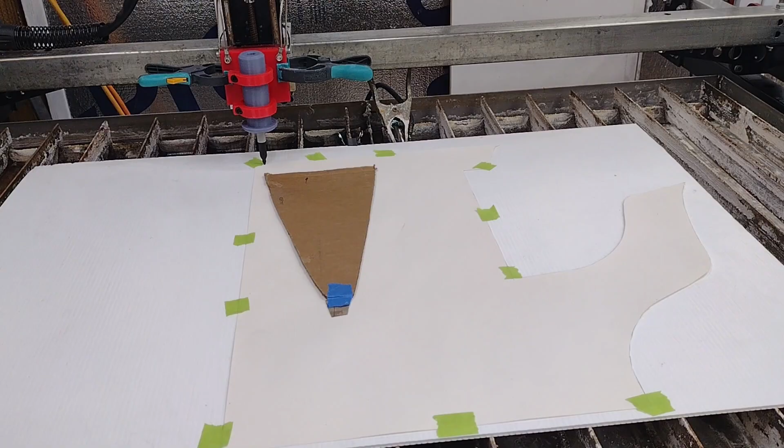I'm trying two tests at once. So normally when we test something out, we're supposed to limit our variables, but I've doubled my variables. I'm gonna try out my new pen holder on my plasma cutter. As you can see, I've got everything set up and I'm gonna try this out.

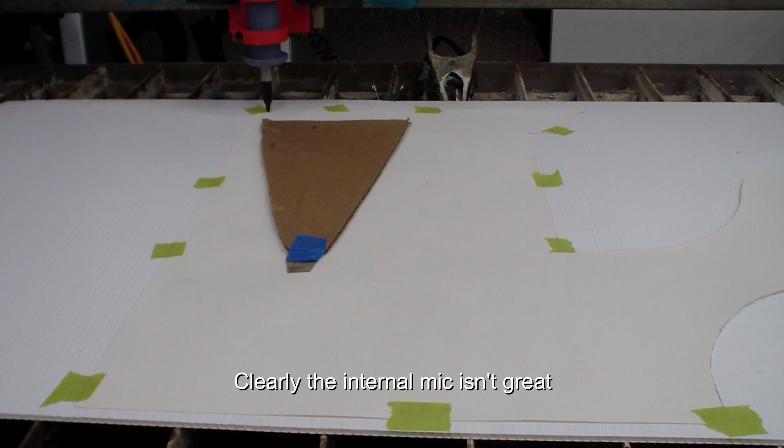I'm also trying out this video camera here that I got as a present years ago. I've tried it before and it wasn't great quality, so I'm trying to tweak it and see if I can get some good quality out of it. So I may revert back to my video camera just to capture this footage here.

So I've got everything set up on Crossfire. Again, I'm going to try this out. This is the first time, so this is a dry run, or a first time run, I guess you could say. It also might be a little slow. This is 20 inches per minute. But I didn't want to go too fast.

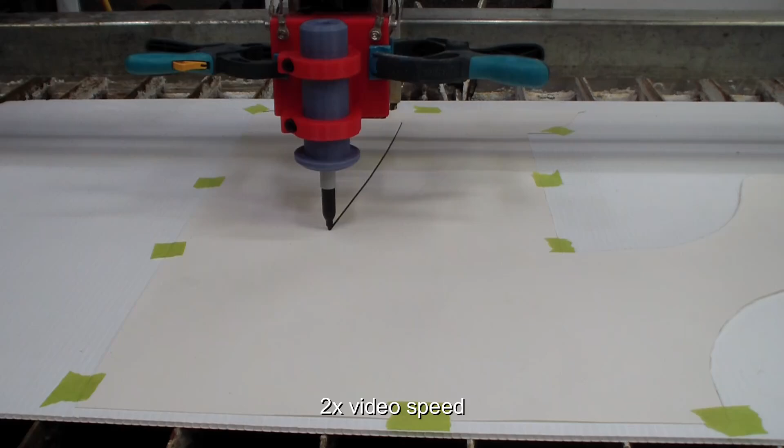I tried to make this loose so it would drop down on its own. In other words, the gravity of the pen. But in general, you can see it's doing fine. I'll probably rerun it again just so I get that top side.

All I'm doing is I'm going to cut this out and then put it in place to make sure that the aluminum for the heat shields on the wing roots, which these are the aft 2/3 of the wing root heat shields, gives the same coverage as my templates. Match them up to my templates and then also do a final dry run on the wing roots.

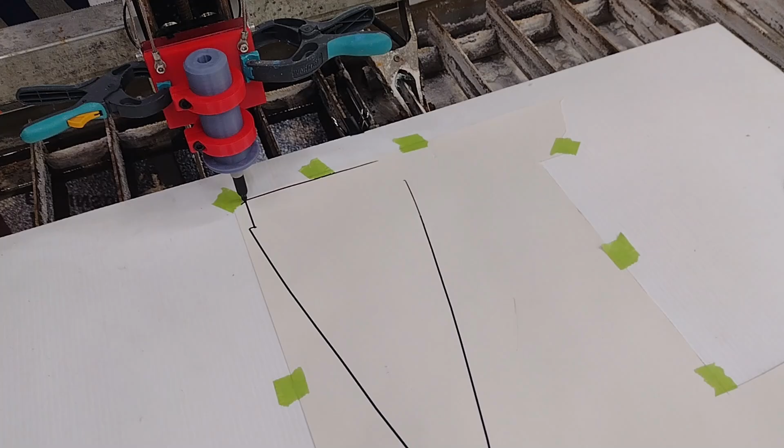Okay, I'm going to do one more dry run to get that one corner with the pen right here. Okay, so this is the right side. Probably should remove that. So this is at 30 inches per minute, just a hair faster. I'll probably start doing this at about 40 to 60. I'll keep upping it more and more.

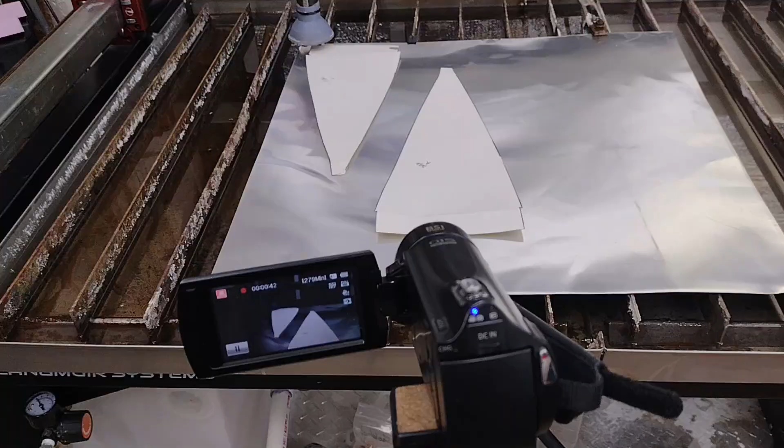Alright, so the test is good. I'm very happy with this. I'll cut these out. I decided to resume my testing of this camera right here by going ahead and cutting these guys out of this 20 thou 6061-0 aluminum. I have to tell you, this aluminum is so thin, it's like peeling peel ply off of aluminum foil. It's got a lot of creases in there. And I actually put a board on there to help.

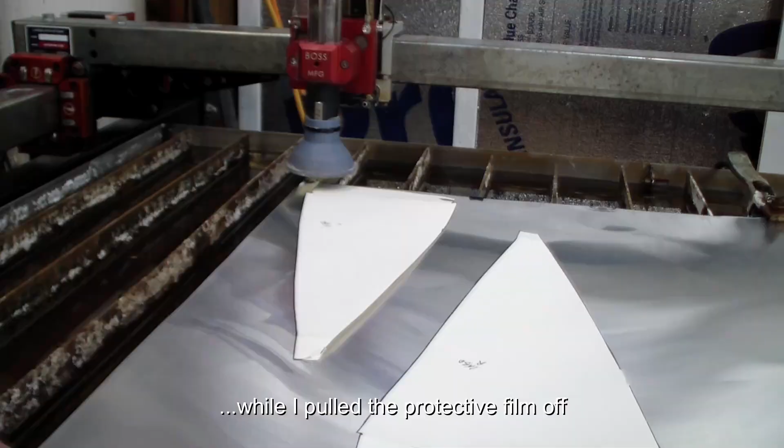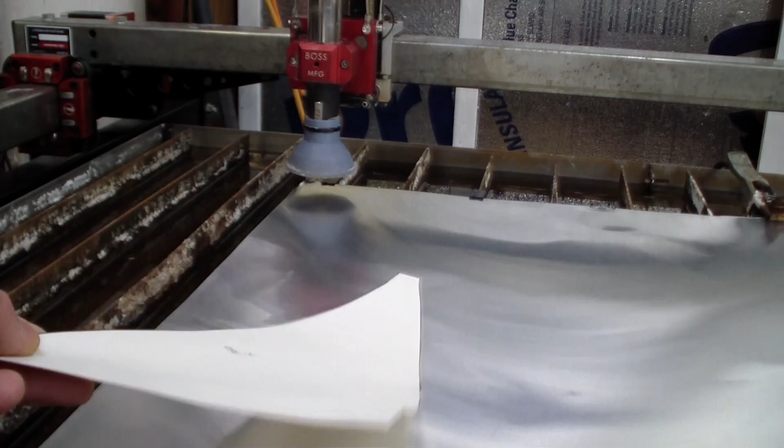This stuff is thin. So I'm going to go ahead and cut the left side first. That's exactly as I put it into CAD. The right side, I took a little bit off around the border, around 18 thousandths all the way around, just to get rid of the thickness of the line. It was just a hair proud. So that should be fine. And then of course, if I need to, I can hit the edges with the file. Alright, let's fire this thing off.

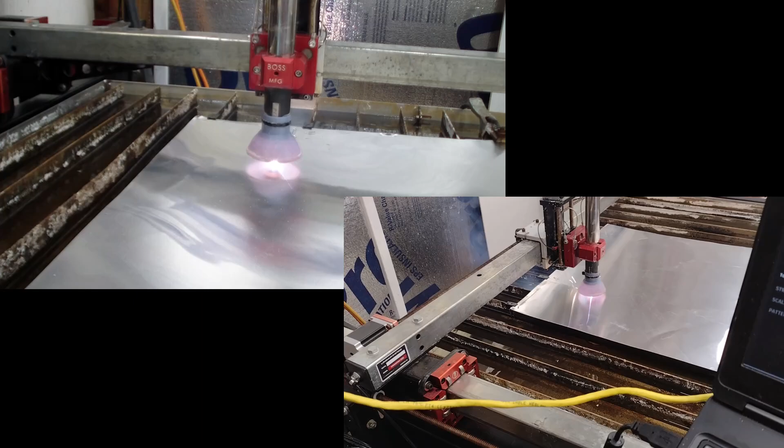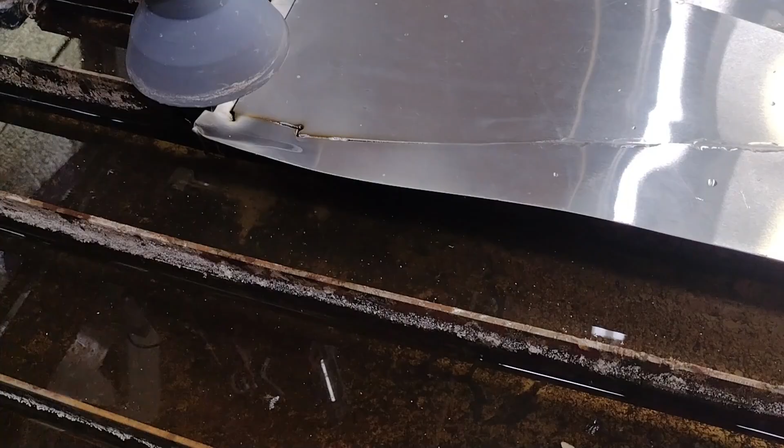I didn't get a cut all the way through just because this stuff is so thin. It's hard to cut. I'm just going to go ahead and do it again. It's not tearing it up as far as the heat signature around the edge. So we'll do it one more time. Here we go.

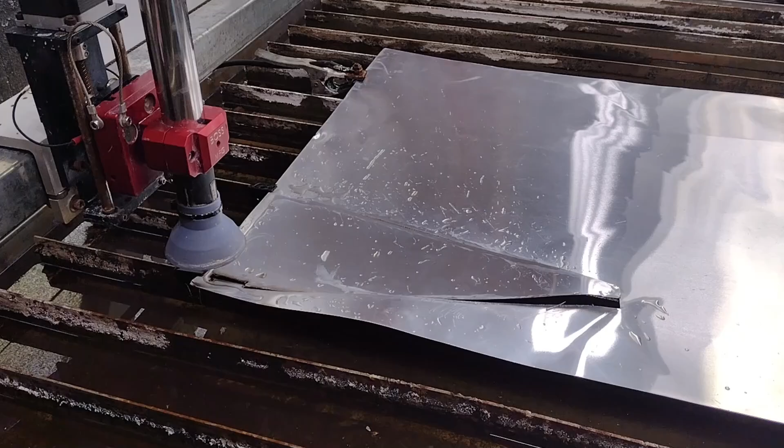Okay, so that was the left side. Got a little bit of curling, I guess, probably from the heat, just the spring back, but I think it's a pretty good cut. Anything that is not cut through, I'll just go ahead and hit it with a Dremel. So I wasn't sure if it cut all the way through, but it did the second time around, so that worked. So there's the heat shield for the left side. And again, this is just the aft 2/3.

I'm not going to be using this thinner 6061 aluminum for the forward third. It's going to be either the titanium 20 thousandths, which will be stronger than this stuff, of course, or it'll be the 32 thousandths 6061, or possibly I might try stainless, and I think it's either 16 thou or maybe 20 thou. So I'll play with that, but it needs to be a little bit stronger than this.

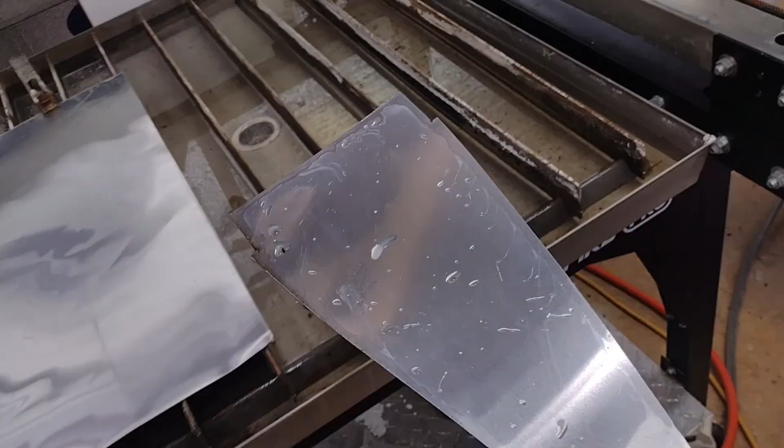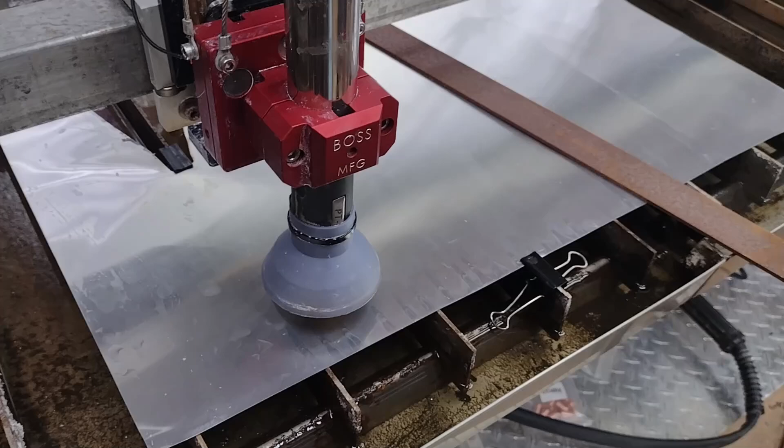Okay, so I've got this set up for the right side. At least I hopefully do, because I don't have a lot of nice 20 thousandths aluminum left. I don't know if you can see, there's a number of little divots and bends just from the handling over the years, and taking that tape off of both sides.

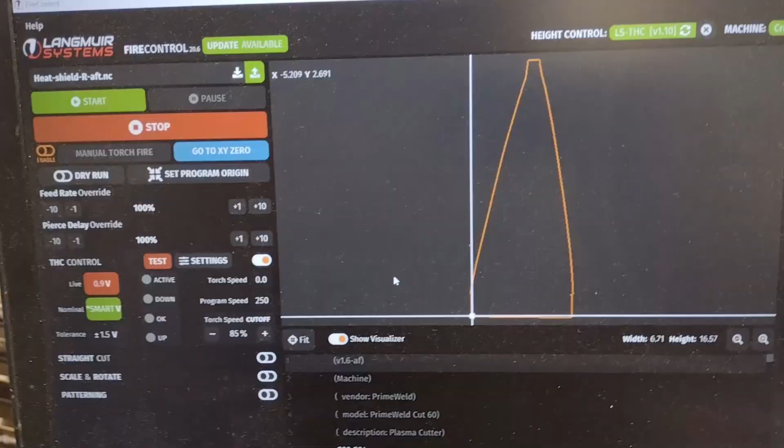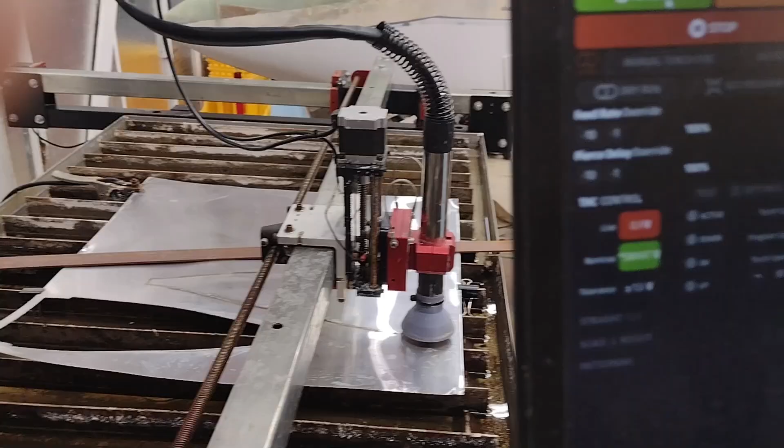Okay, I got an error again because it's so thin. We're going to try this again. Okay, I post-processed this again. I changed a couple small parameters, partly based off of the warning that I got. So we'll try this again, see if it cuts any better. Nope. Okay, I thought this might be a little bit camera shy, so I tweaked a couple more parameters and then tried it again.

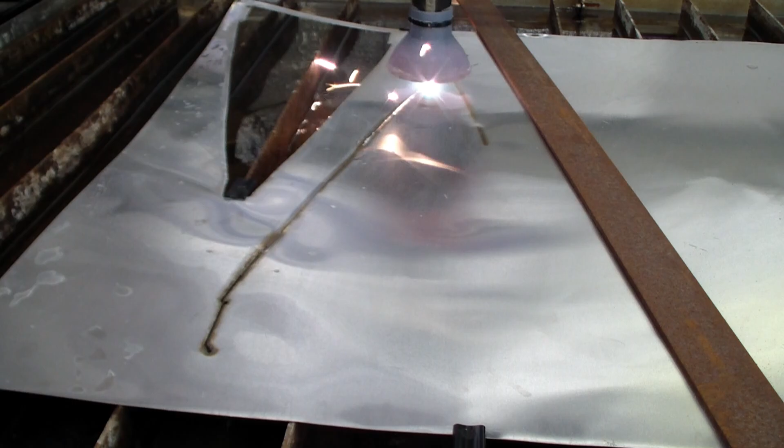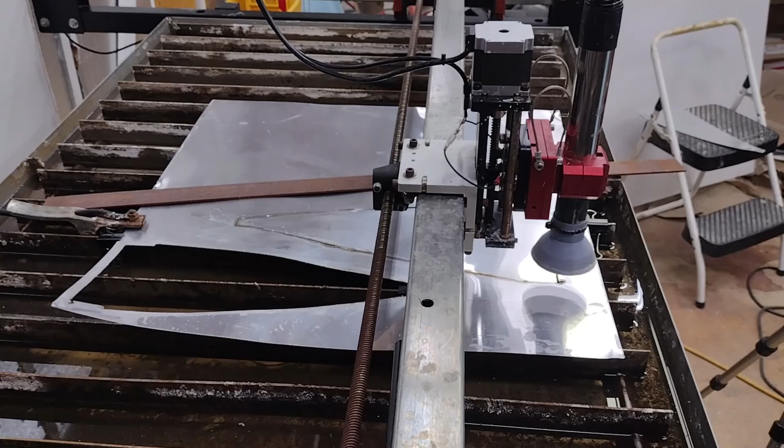It made it all the way around. I think one more cut and it'll cut it out. So it'll cut it out as far as cutting out the shenanigans and actually cutting out this piece. All right, we're going to try it one more time. All right, I think we got it. Finally, success.

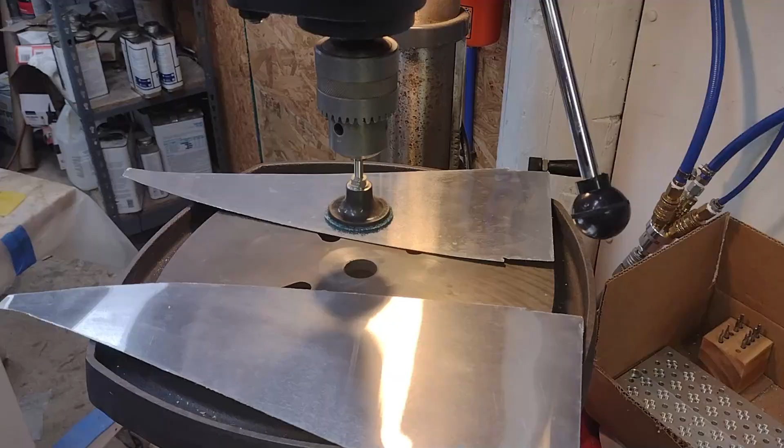And then see what we got. Yep. Okay. So here's the right side. And I think I was able to get it through where all the dents and stuff were. So I think we've got two actually good pieces. So I wasn't sure if I was going to engine turn these heat shields or not.

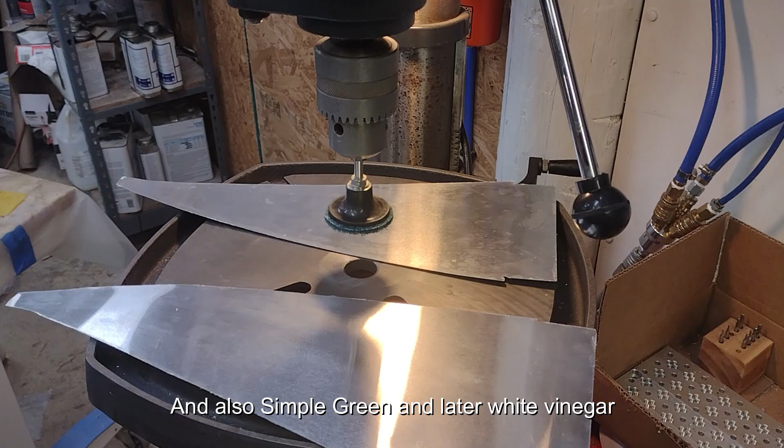And then one issue that kind of cropped up that I wasn't expecting, I wiped these off quickly when I plasma cut them last night. And then this morning, as I was cleaning them up, I hit them first with acetone and it cleaned them up in general okay. And then, especially on the left side, there's just marks on there that I guess if I hit it with aluminum polish, they would clean up and that would be fine. I don't have any aluminum polish. I was leaning towards engine turning them anyway.

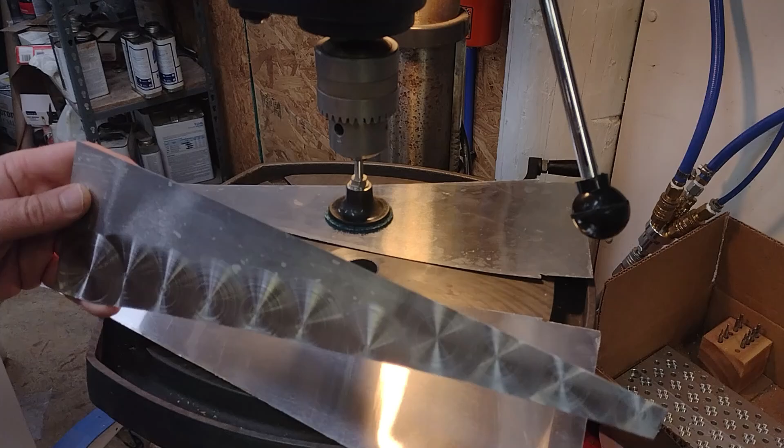One of the issues is that, again, this material at 20 thousandths is so thin that I didn't want the pressure of the disc coming down to deform this, or because these can get a little bit hot. And so I just grabbed a scrap and I didn't even clean it. So this is right off from one of the sides of when I plasma cut these heat shields out. And again, I didn't clean this, and then I just hit it really quickly when I mounted this. I'm sure if I cleaned it up a little bit more, it would look even better.

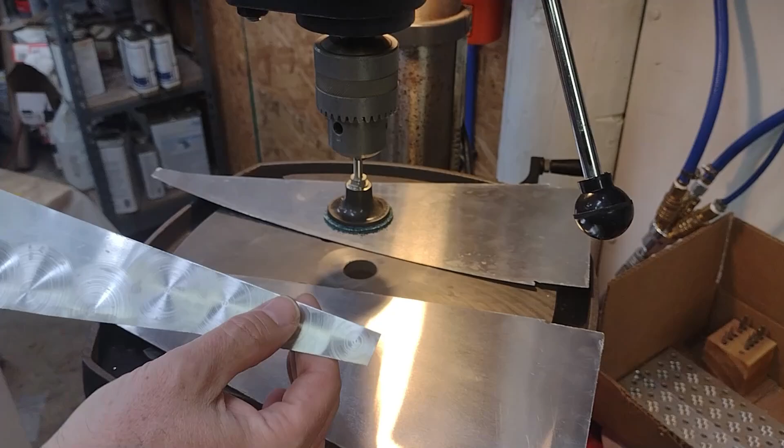It didn't in any way, shape, or form, especially on the narrower end down here. I was a little concerned with the pressure coming down, that it might bend it up or something. It did fine all the way down, just like on the 32 thousandths. So I'm going to go ahead and engine turn these heat shields, and I'm not going to engine turn the other ones. And when I mount these here in a little bit, I'll show you the difference. These are on the very edge of the wing root.

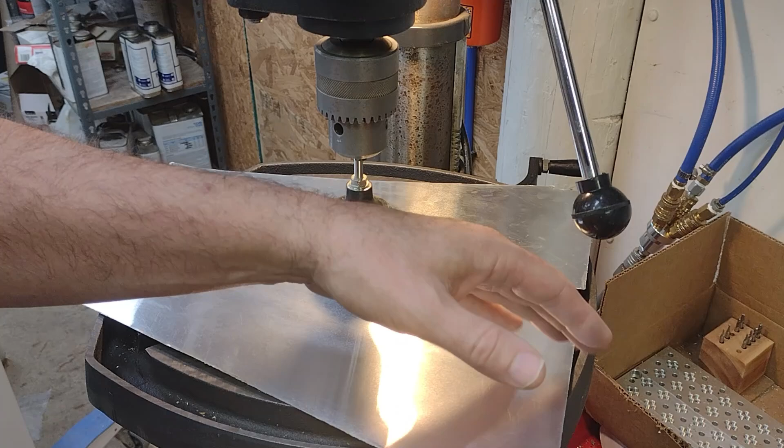The other ones in front of these are inset about 1.5 inches, and that's what these little round grooves are for, because I'm going to bend this after I engine turn it. I'll bend these tabs, which are 1.5 inches, in 90 degrees, and then they'll marry up with a dog leg for the front, which is inset 1.5 inches, because that's going to go forward and hit right at the very front corner of the wing on the vertical corner.

And there's a gap there between the wing and the center section spar that needs to be covered or filled in to keep the hot gas pressure from the engine compartment from running down the center section spar and escaping out along the center section spar. Not only do you not want that heat going out along that bare glass that's not covered up along the center section spar, but you're also losing cooling air, and then you're allowing hot air to go down, and you just don't want it. So a few different reasons for covering that up. Thus this bend right here.

Also, this side's still dirty, but it took me maybe 5 minutes a piece, just hitting the edge with a Dremel tool to get the dross off, minimal dross. The cuts on these are really good. There's hardly any heat affected zone visible, and so I'm really happy with the numbers so far that I've got off the matrix that I built for all the feeds and speeds, if you will, for the plasma cutter and the plasma cutting table.

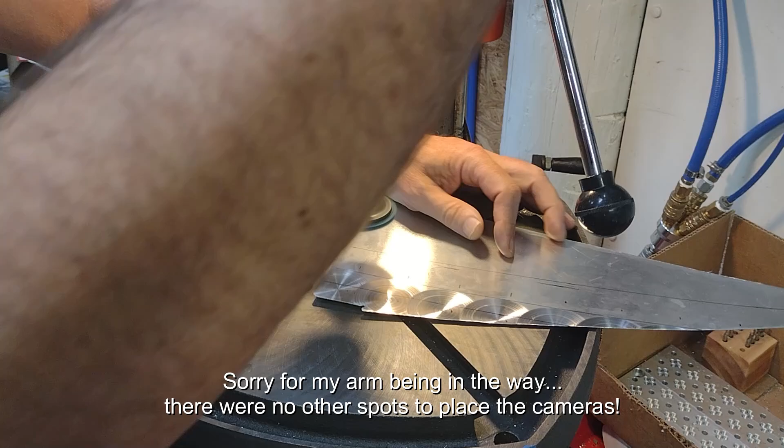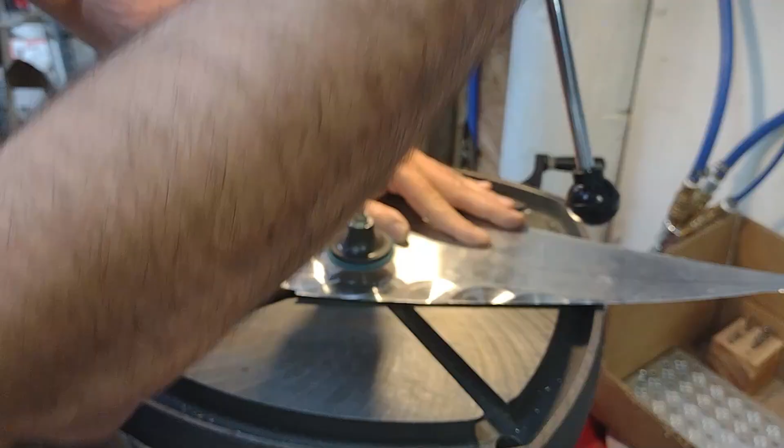All right, I'm gonna get to this. To get this started, and to not belabor this video, I went ahead and started this first row. This is on the left. Now the left heat shield covers about 2/3 of the wing root from the very aft end forward, and then the right covers about 3/4, but just as a little side note. But here's the beginning, and then I'm going to go ahead and do the next row. Looking good. I'm going to mark up and do the next row.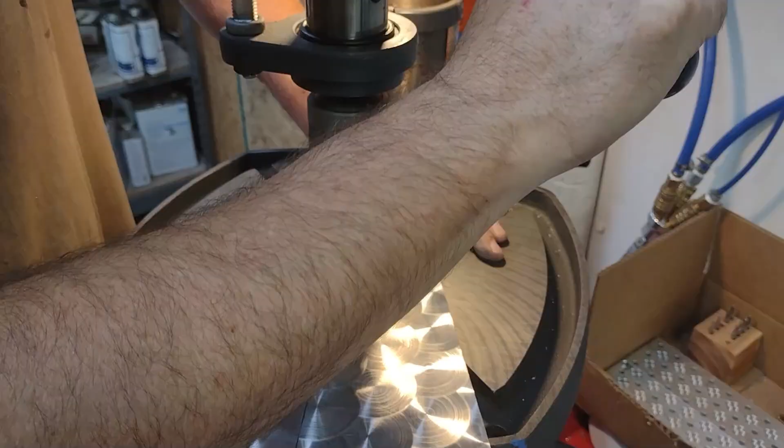Like I said in my last video, if you look closely at any individual circle, you can definitely see lines and all that, but just the total effect that you see, that prismatic effect, it just really spiffies it up. So again, this is the left side. I'll clean this up, and then I'm going to bend this, and obviously I'm going to do the same thing on the right side. This is definitely looking good, and I'm pressing forward.

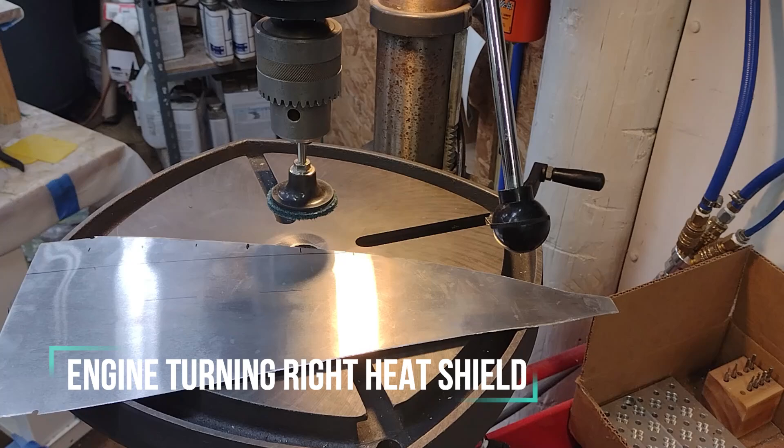Okay, sorry about my arm being in the way. I tried to get these cameras set up as best as I could without blocking the shots. We're going to continue on with the right side. I'm going to do the same thing. I'm going to start from the forward top side and then move down just like I did on the other side. There's a creature in here, trying to get rid of them.

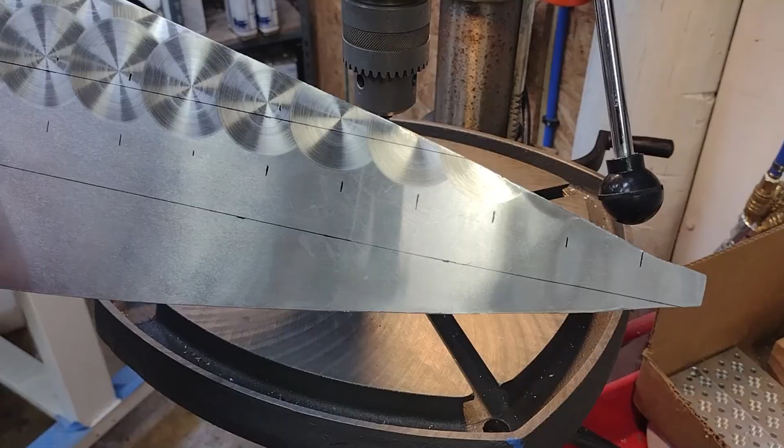There's the first row. I've got probably the longest run, as you can see, goes all the way to the end here. Again, gonna mark it up. Line number 4. Need to mark this last one. Okay, one more row to go.

We are officially done with the engine turning. And again, it's not perfect, but I'll always go back to my statement of that prismatic effect overall just really makes it look cool. And it doesn't really take that much extra time, probably 45 minutes for each piece. Here's the left side.

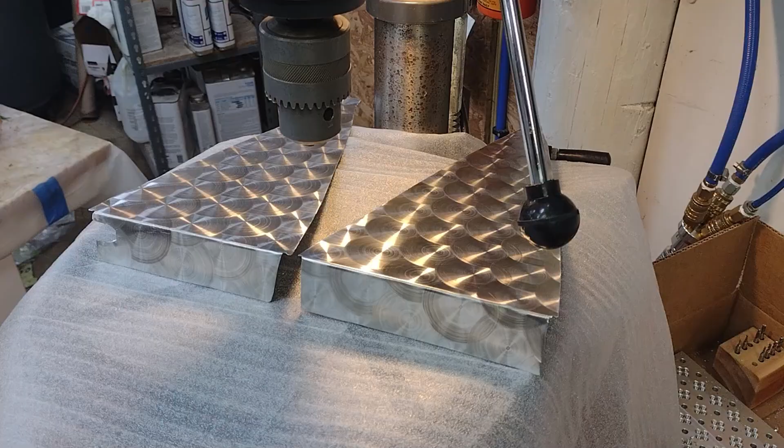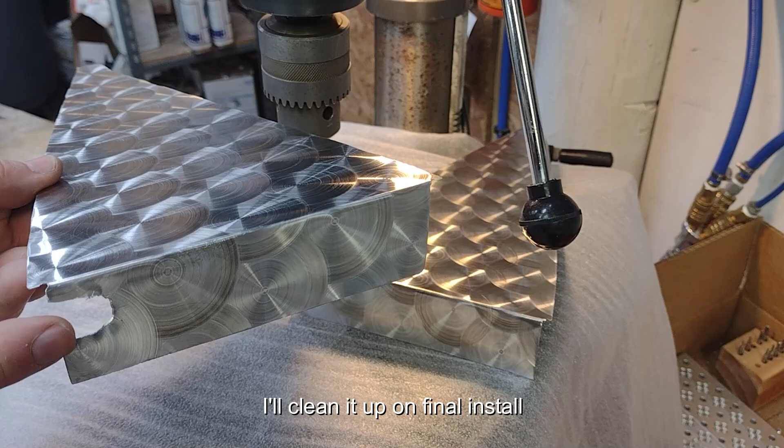Okay, so I'm going to get to mounting these things. I wanted to show you just really quickly that I bent the front tabs 90 degrees and I had to trim them up a little bit, both on the top and the bottom on each one, a lot less on the right side, but nonetheless I still had to trim a little bit away, mainly because of the thickness of the L-shaped tabs that I glassed in that are going to hold these in place. And then I had to make this little groove, little notch right here because of a cam lock. I can't get this in and around the cam lock unless I take the oil cooler out. By notching this right here and then bringing this down just a hair at an angle, I'm able to squeeze this in with the oil cooler in place on the left side.

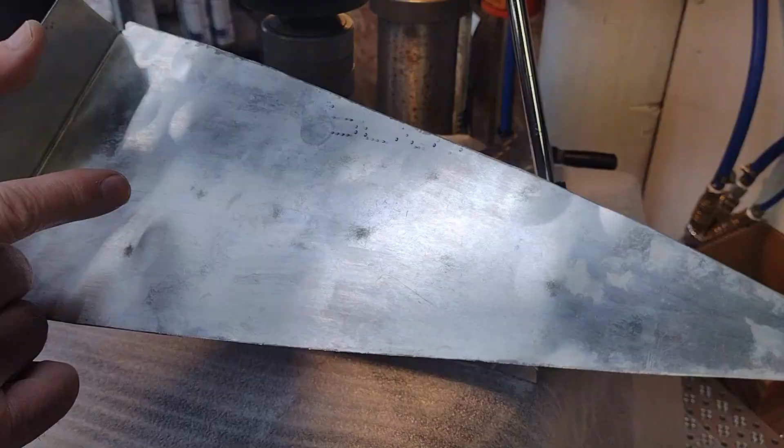I bent them on the metal brake. Took me probably about 30 seconds, 45 seconds to line them up with the bend line, and then it probably took me 10 seconds to bend each one. So 2024-0, so it's pretty soft. Oh, speaking of which, I still haven't cleaned up the back sides, but I don't know if you can see this. There you go, from the heat and the pressure in here, it actually did make some indentations. Kind of interesting, but I'm sure it'll work nonetheless. All right, I'm going to get to installing these. Just wanted to show you that.

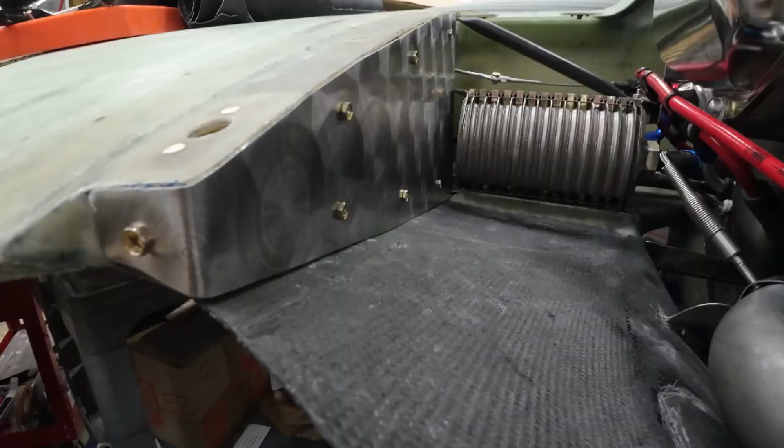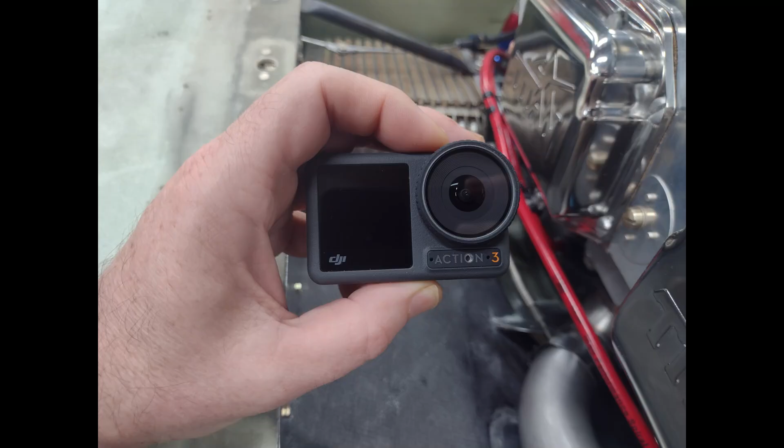Okay, sports fans, as I show you the installed and completed left wing root aft heat shield, which I of course have been working on. I'll note these are not the final screws, these are just temporary, but I've added another variable to this whole entire adventure, and that is the camera I'm shooting this on, which is the DJI Osmo Action 3. It's essentially a GoPro equivalent, some say better. I'll let the people out there be the judge, but I'm shooting this in 2.7K on the left side. I'm going to try it on 4K just to see if there's a difference.

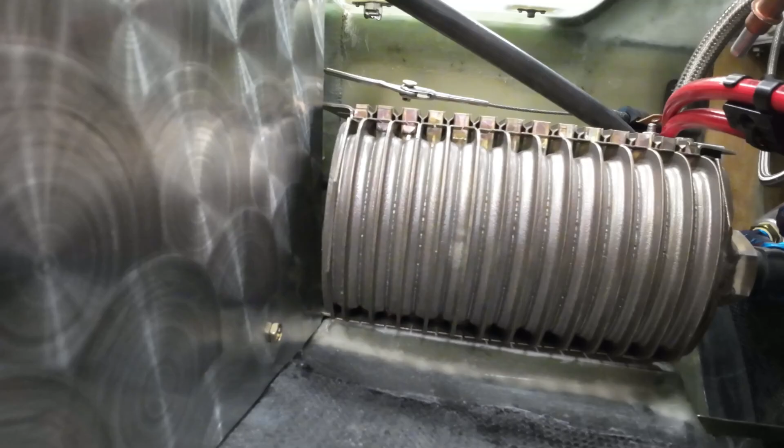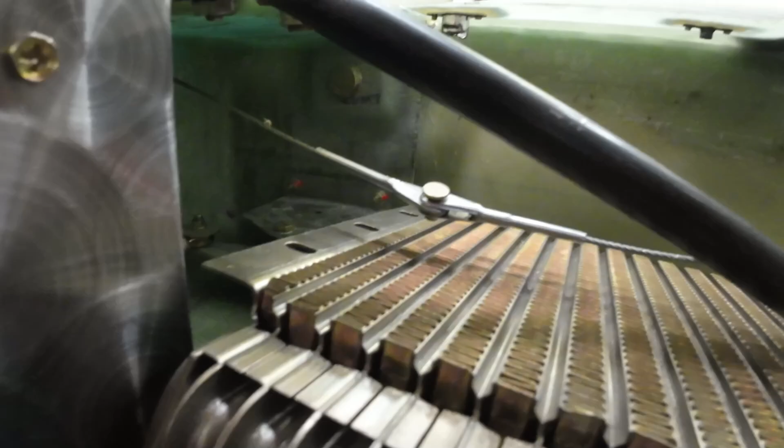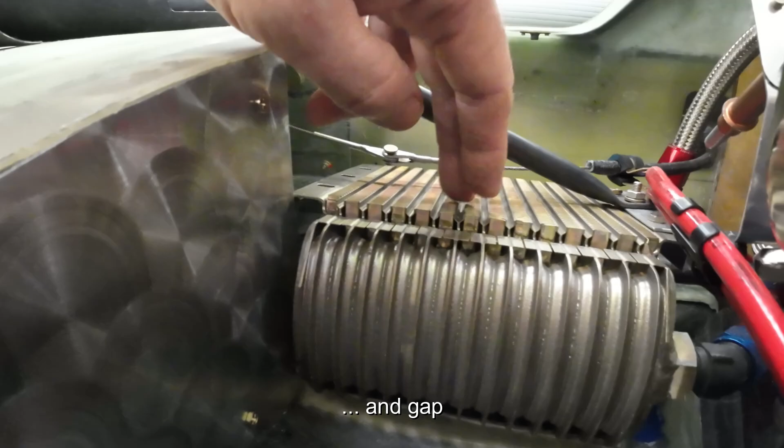As you can see, up here, this is the configuration I was talking about throughout the construction of this heat shield, where we have this protrusion by way of this oil cooler. That drives us to need to inset the forward heat shield 1.5 inches inboard. You can see the edge of the corner of the wing where there's a gap I'm putting my fingers into. That gap needs to be covered, and that's the gap that goes back down along the center section spar. So the forward heat shield on the left side, because of that edge there and because of the oil cooler, will be inset 1.5 inches.

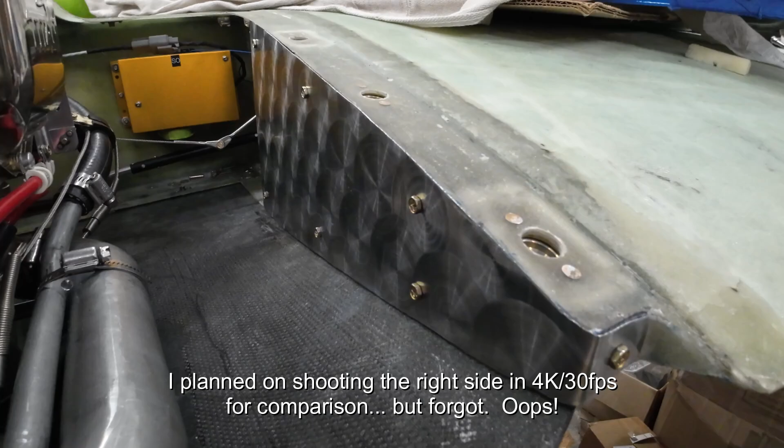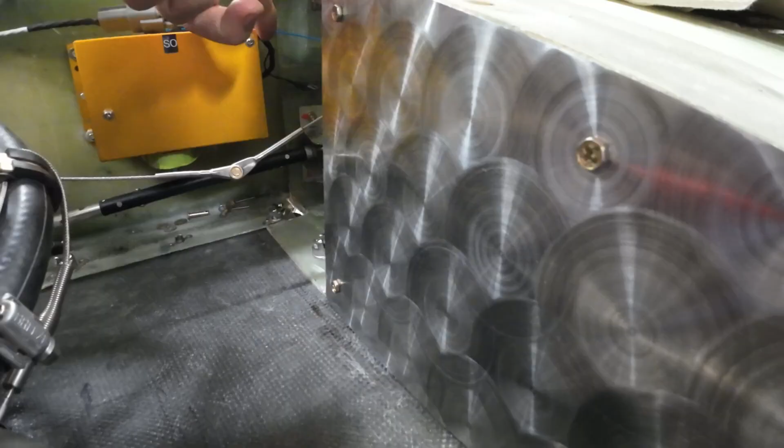Welcome to the right side. Here we have the completed wing root aft heat shield, also with the temporary screws in place. At the front, this fancy gold box is the autopilot roll servo. That is what's keeping this from just going straight in. I have about 3/4 of the aft wing root here covered up by this heat shield. And then if you can see back in here, that's the wing edge where I'm going to have the inset heat shield. There is just enough room if I go 1.5 inches in to get around this roll servo. So I just wanted to show you this, the adventure of making these heat shields.

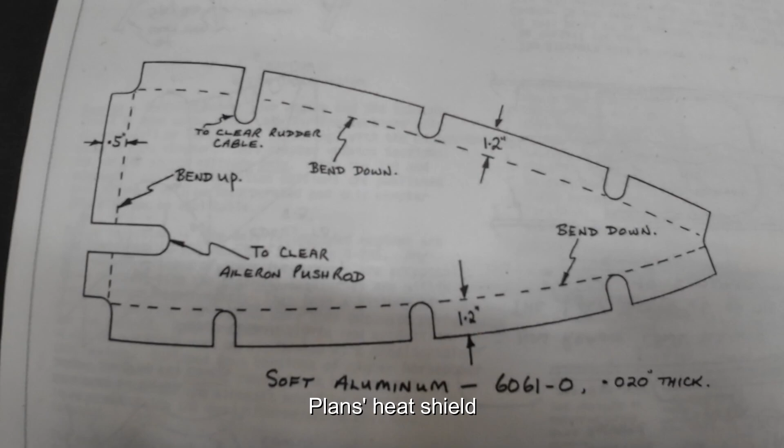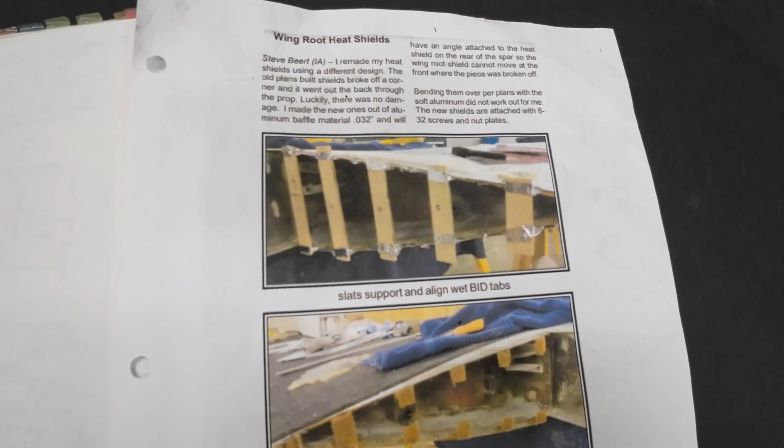Okay, a quick postscript, guys. During a discussion I was having with Steve Beert last year about installing and making the carbon fiber inner baffles, we discussed how he made his wing root heat shields. He actually wrote an article up about it, and that's where I got this idea. I think Mike Beasley installed the Steve Beert style of wing root heat shields. And again, I need to give credit to Steve Beert. This is the original, and then this is his write-up.